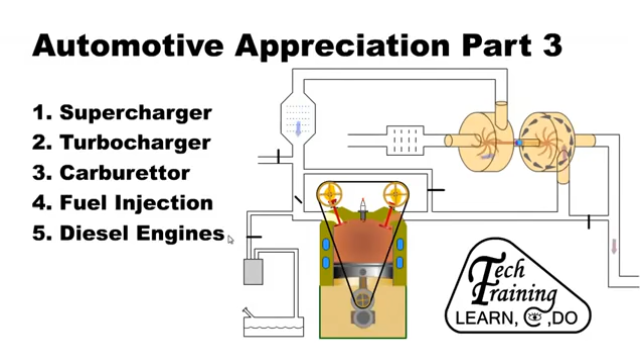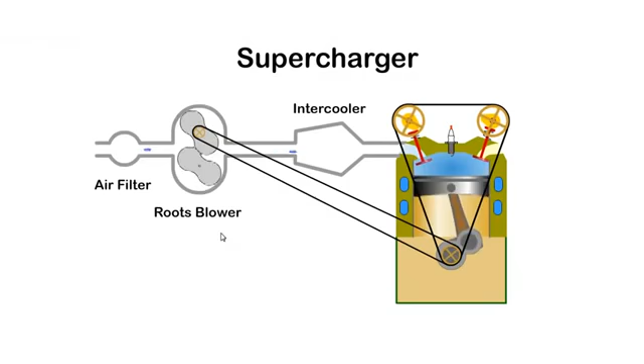On the intake stroke we want to get as much air into the cylinder as possible. Air intake can be improved by pressurizing the incoming air with a pump driven by the engine. The pump is called a supercharger, and in this case a Roots blower is used. This system improves air intake. However, the belt-driven blower takes power from the engine. A better option is to use a turbocharger, which is driven by the waste exhaust gas.

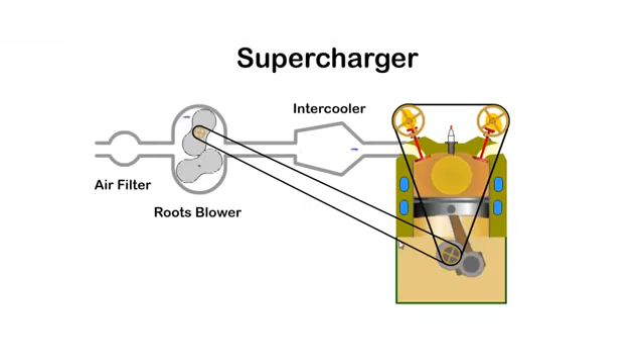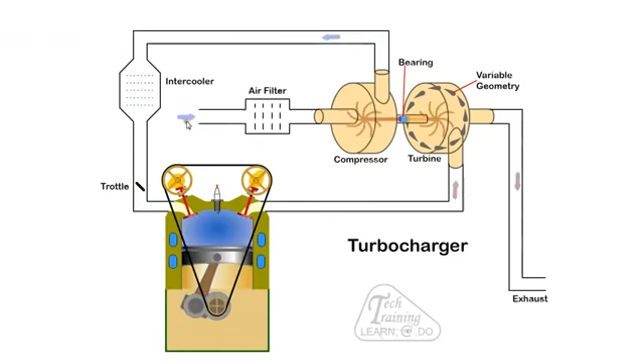A turbocharger uses the energy in the waste gases exiting from the cylinder to spin a turbine which drives a compressor mounted on the same shaft. The compressor draws clean air in through a filter and compresses it. Unfortunately, compressing air also heats it, resulting in expansion. It's best if this air is cooled with an intercooler before entering the engine. As the turbo spins at high speed, up to 150,000 revs per minute, the bearings are lubricated by oil. The oil reduces friction and removes heat from the turbo.

When a cold engine is started, it should not be revved until the oil has reached the turbo. Likewise, a hot engine should idle for a short period before turning off, allowing sufficient time for the turbo to slow down before the oil pump is turned off.

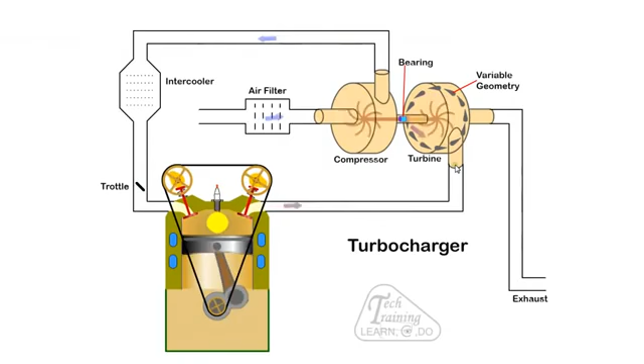As we require constant boost pressure from the turbo, it is common to use a variable geometry turbine. The vane angle can be adjusted depending on exhaust gas flow. At low gas flow, the vanes are in the closed position. As the gas moves through the small gap between the vanes, its velocity increases, thus increasing the turbine speed. At high exhaust gas flow, the vanes are opened, thus reducing gas velocity. At low speeds, the vanes are again closed.

Other ancillary equipment includes a wastegate. It is used to bypass some of the exhaust gas from the turbine when it is not required. A blow-off valve or dump valve is used to vent pressurized air to atmosphere when the throttle valve is closed, thus preventing damage to the compressor. It tends to make a whoosh sound when it activates.

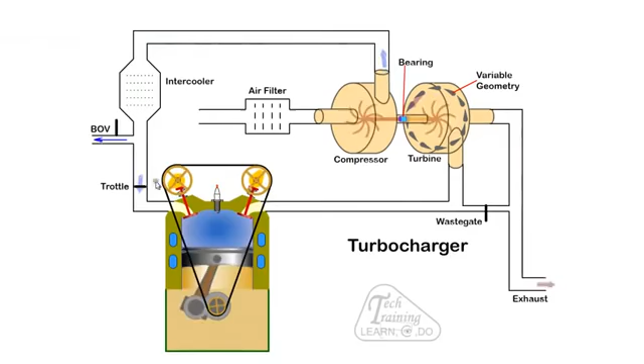Exhaust gas recirculation, EGR, recirculates a small amount of exhaust gas back to the inlet under certain operating conditions. This reduces the amount of oxygen in the charge and helps to reduce combustion temperatures and emissions.

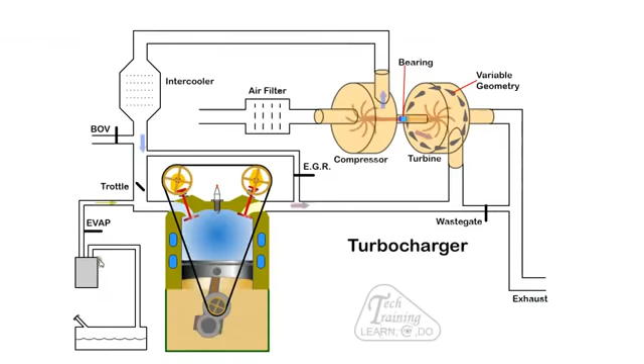When fuel is stored in the fuel tank, it will emit a vapor. To comply with emissions regulations, this vapor is not discharged to atmosphere. When the engine is not running, the vapor is collected in a charcoal canister called the EVAP, Evaporative Emission Control System. When the engine is running, the EVAP valve is opened and the vapor is drawn into the engine and burned. An engine will not have to have all this ancillary equipment, as some items are used for similar tasks. Also, some are more suited to diesel than petrol engines.

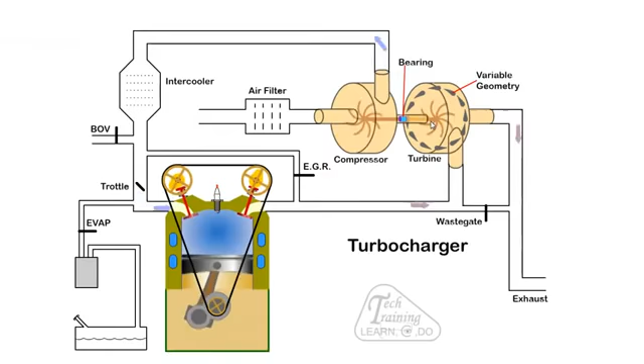A common problem with turbos is turbo lag. When the engine is accelerating, there is an increase in airflow through the engine and thus through the turbo. However, it takes time for the turbo to spool up to speed and develop the required boost pressure. This time delay, or turbo lag, is noticed when accelerating. At mid-range we get a surge in power as the turbo develops boost pressure. A variable geometry turbo helps to reduce turbo lag.

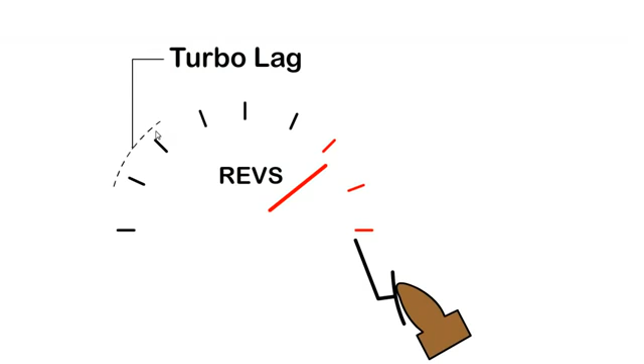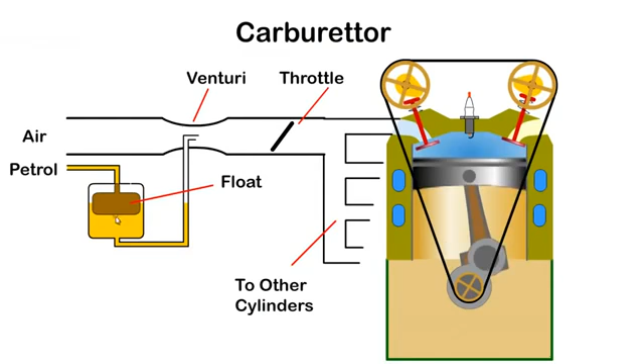Early engines used a carburettor to mix petrol and air together. Air is drawn into the engine by the pistons on the intake stroke and the flow is controlled by the throttle. The narrow passage creates a Venturi effect and draws fuel into the airstream. When the fuel level drops, the float moves down, thus admitting more fuel from the tank. Ideally, all the fuel should atomize, break into small droplets, and mix with the air, but some will condense on the inlet manifold. Disadvantages include poor mixing of the fuel, inaccurate fuel metering, difficulty with cold starting, and high emissions. This system has been replaced with electronic fuel injection.

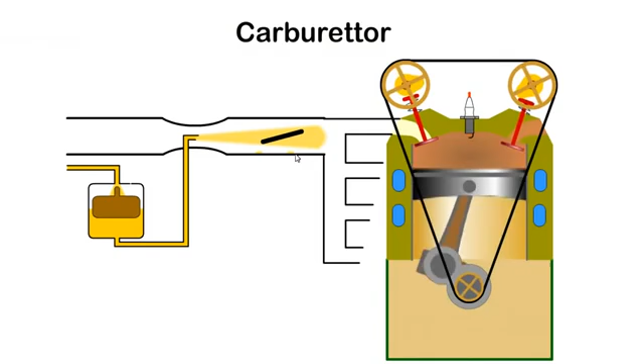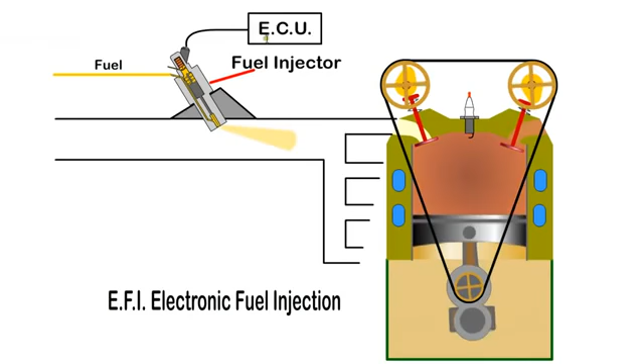With electronic fuel injection, EFI, a pump is used to pressurize the fuel, which is atomized by the injector as it enters the inlet manifold. An electrical solenoid is energized by the ECU, which determines the quantity of fuel required.

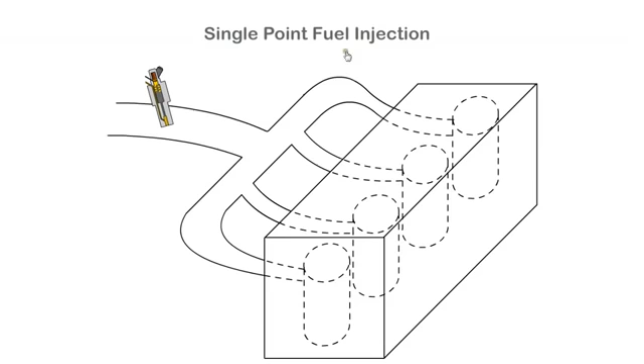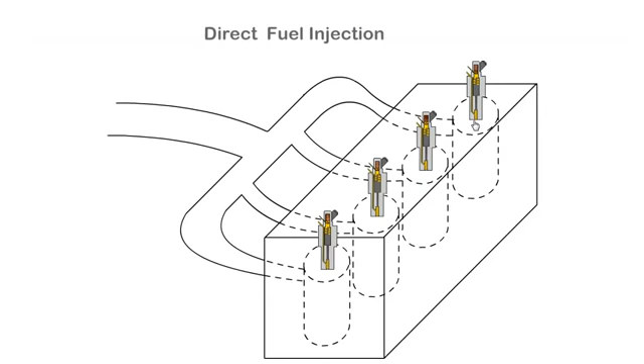There are various layouts for the fuel injectors. Single point: one injector is used for all cylinders. Multi-point: an injector is provided before each inlet valve. The fuel is sprayed as each valve opens. And direct injection: the fuel is injected directly into the cylinder. A fuel rail stores the petrol at high pressure, and the ECU provides the signal on when to spray the fuel into the compressed air. Similar to the timing of the inlet and exhaust valves, it is possible to adjust the timing of fuel injection depending on speed and load conditions.

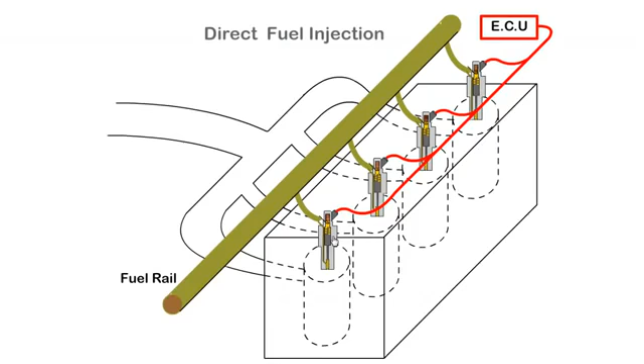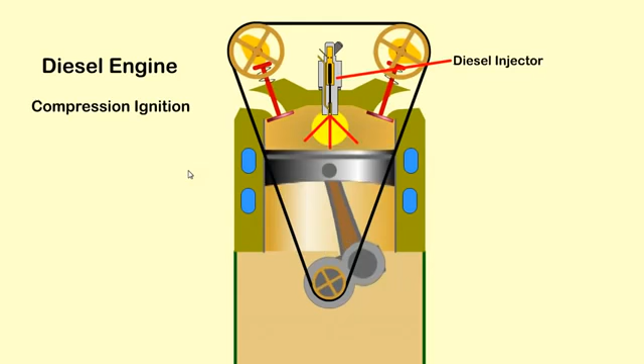So far we have dealt with SI, or spark ignition, engines. A diesel engine is called a CI, or compression ignition, engine, as it relies on the high pressure charge to self-ignite and doesn't need a spark plug. When the piston is near TDC, diesel is injected directly into the cylinder and ignites in the hot air. Diesel engines operate at a higher compression ratio, are heavier in construction, provide good torque, and are particularly suited to turbocharging.

Here we show the operation of a fuel injector. Fuel enters through this pipe and some flows into the small chamber above the needle through a small orifice. This high pressure fuel keeps the injector closed. When the ECU, electronic control unit, energizes the piezo crystal, it expands and the valve moves down, releasing the pressure fuel in the top chamber. The high pressure fuel moves the needle up and the fuel is injected. When the crystal is de-energized, the valve closes and high pressure diesel closes the injector.

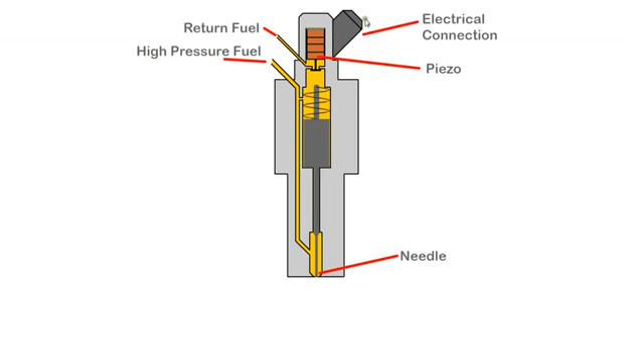On a modern car, there might be three phases of injection: pre, main, and post-injection. This provides a controlled burn of fuel, reducing noise and increasing power and efficiency. The pressure in a diesel common rail system can be up to 1,500 bar.